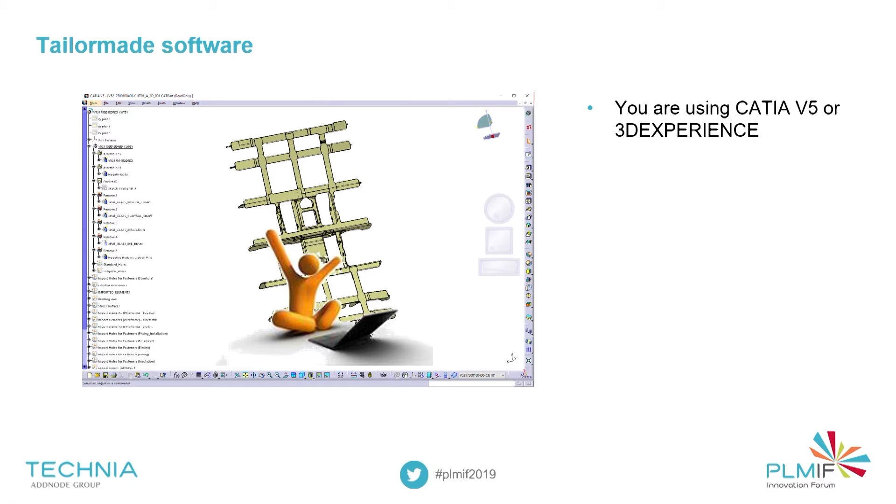So even if CATIA and 3DX are very mature and good products, no doubt, from time to time you or your users may have a wish list because some things are missing. This could be automating your processes, bringing in new calculations, new integrations or whatever. And when it comes to this point, there's the option, and this is where a lot of our products have been born or invented. Also, Remove Invisible was at the beginning a pure customer project.

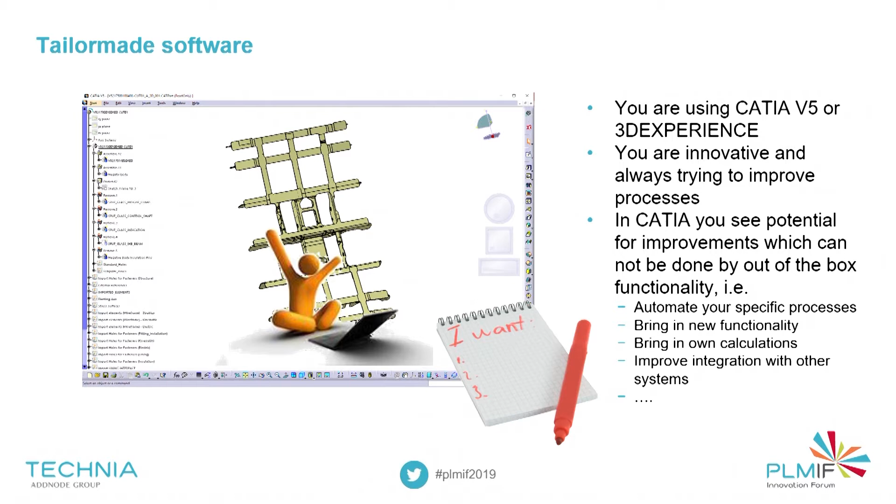So we have the possibility, and CATIA provides different technologies in order to leverage it. Here we can go quickly through it. Knowledgeware you probably know. Here you can already do a couple of automation and checks and show something in the CATIA tree. CATIA automation is scripting. Maybe some of you are already using it because it's quite simple, but sometimes also limited. It's intended to automate certain steps and processes.

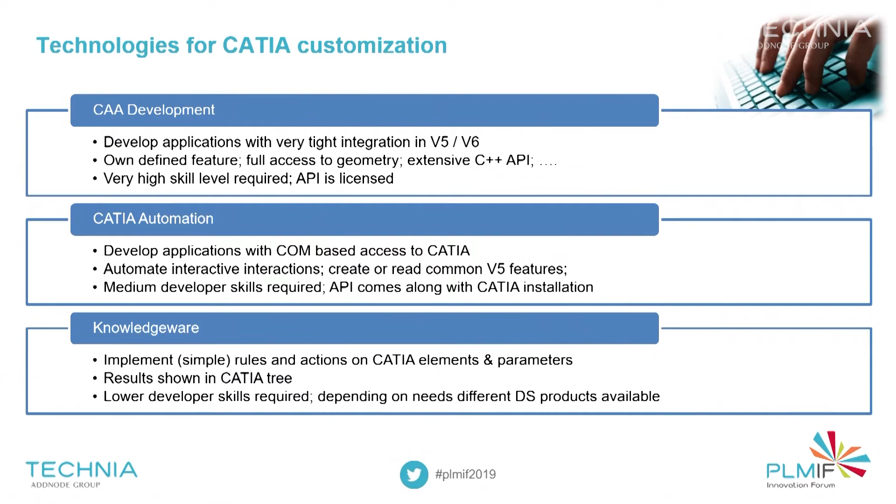So if you really want to do tight integrations, as you have seen with Carver or QChecker, where we touch the geometry, where we have own features in the tree and so on, then there's the capability of so-called CAA development. That's purely C++ development. It's also licensed, but that could be something for you, no doubt. But if you go this way, you have to really ensure that you have 100% of a person working on it, because just in the evening, that doesn't fly. But we can provide services, and we have 5 examples on how it could look.

So the first one is MET - MIBA. That's a customer situation where you have the 3D model and you want to make screenshots of the 3D model. That's not really sophisticated, but here the additional input into the resulting JPEG files is a transformation matrix. So additional information is written to the JPEG file header, with knowledge about the orientation and camera position. It's a very simple user interface where the user can capture these images and store them. From existing images, you can load them, and the position will be changed in 3D.

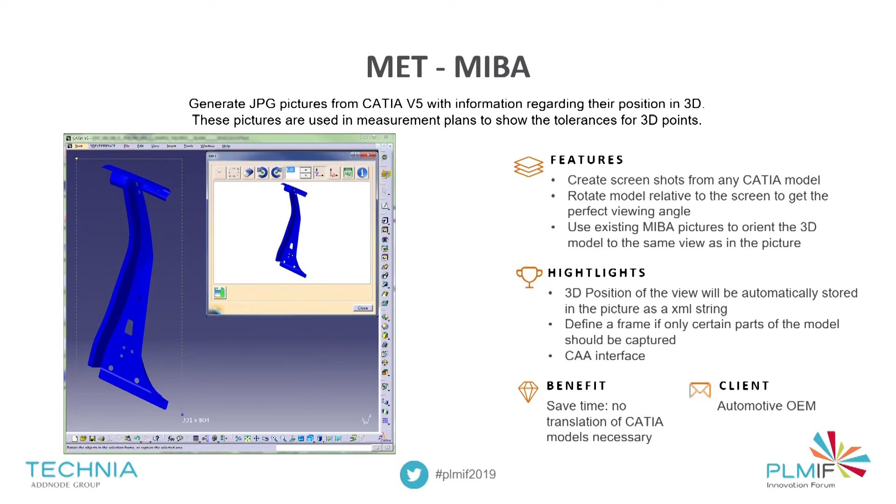The interface is CATIA CAA development. For the customer, it saves a lot of time. The previous process was translating the CATIA data to a neutral format, loading this into a new application, making screenshots, adding the camera positions, and then they have the final JPEG. So a long way to get just one image. Here it's very easy for the end user. Everybody can just use it, open the rectangle, push the screenshot button, and you have the screenshot right away.

We do not expect that you will need this application one-to-one, no doubt. But this should give you a glimpse of what is feasible. We also have customers using this screenshot functionality from certain angles to export to PowerPoint, directly in the right management format, just clicking a button or running a batch process and getting the perfect PowerPoint, also with some text input. So maybe with this input you can find other places where you can improve your processes and make your engineers happy. Correct. Give you ideas of what is feasible. That's the intention.

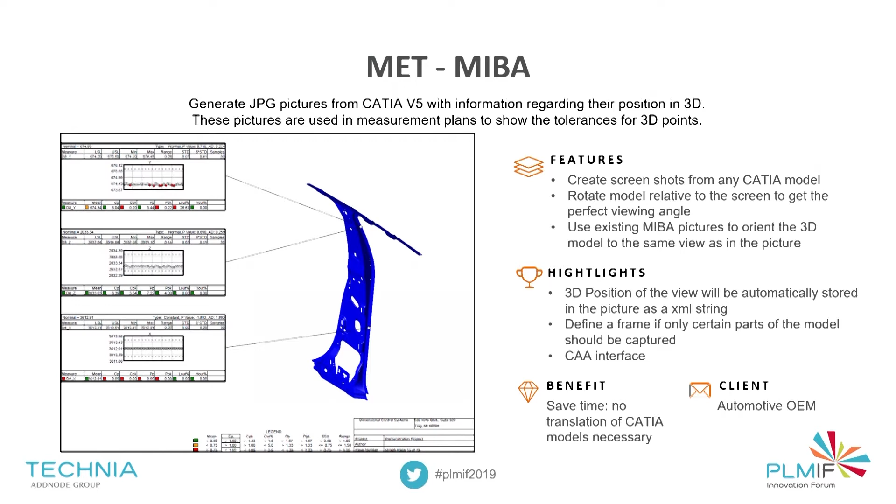The result will be a screenshot, and the customer will use it in downstream processes for measurement plans, and the real measured results will be attached to the 3D or the JPEG model. In this case, they have a quality tool. Correct. Where they need this information in order to check whether the real data in production is according to the CAD data. Yep, correct.

Okay, second example. With Meiller Kipper, that's a project we did about bill of materials. The product restructures the assemblies according to their needs, which are also needed when they do a sync with SAP. It also automatically generates text leaders and BOMs, and finally creates BOM tables that are put on the drawing or in Excel sheets, which will later be sent to SAP. Correct. So it's a couple of different functionalities they use to fulfill the need for the SAP exchange, having all the relevant BOM information in the different formats they need.

Correct. So you also have an inbuilt CATIA application where the user can go step by step through the different scenario steps: restructure it first, create the text leaders, create the BOM list, fully integrated. Also with status queries, you have history and updates integrated in the CAA interface to see if things change between revisions. You get the update status, and you can just click on the local update to get this pushed to the 3D.

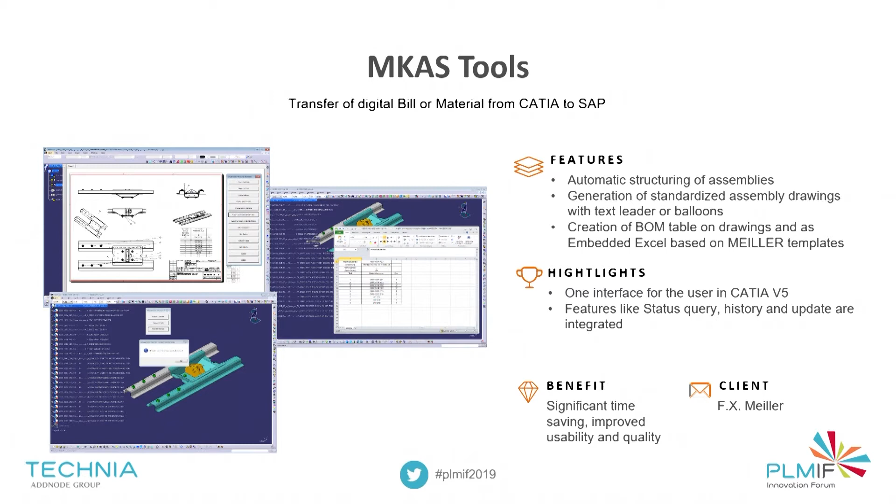And it was also very interesting because it started with a small CATIA Excel application, to extract information from the CATIA model, put it into Excel and save it, and then the users got more and more hungry. They figured out, hey, that's working great. That's exactly what we need. What if we do more in this process to fully fulfill the requirements for the SAP and BOM integration?

Indeed, the initial scope was much smaller, and then we see continuous delivery of days, yeah. Correct. With the continuous delivery, we delivered first prototypes, and then discussed a lot in exchange with the customer, and then users get hungry, and new ideas were born.

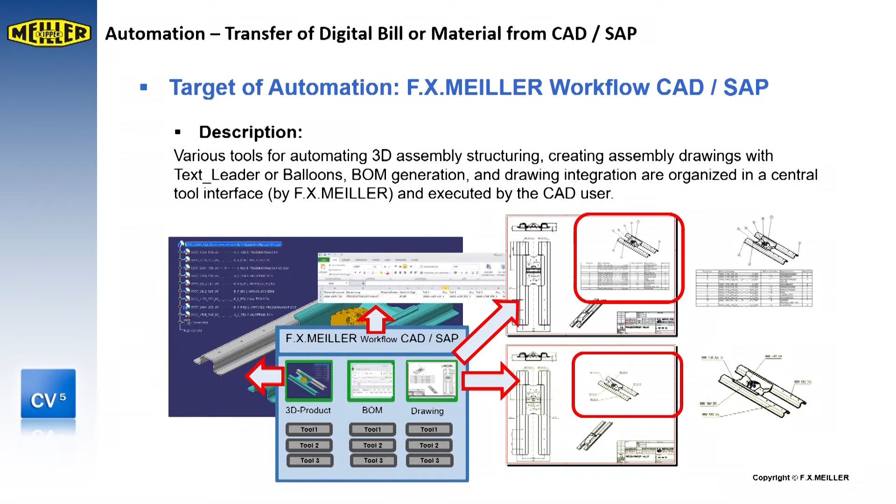It's just again showing how it looks like. You have the 3D structure, the BOM, and the drawings. So the drawing is automatically created. The text leaders are positioned. The drawing table is positioned on the drawing itself, but also exported to Excel with a specific format. Also, the customer here had very specific requirements on the format, how the Excel sheet looks like, depending on the processes, depending on the products, with colors, with text sizes, very customizable and adjustable to these templates.

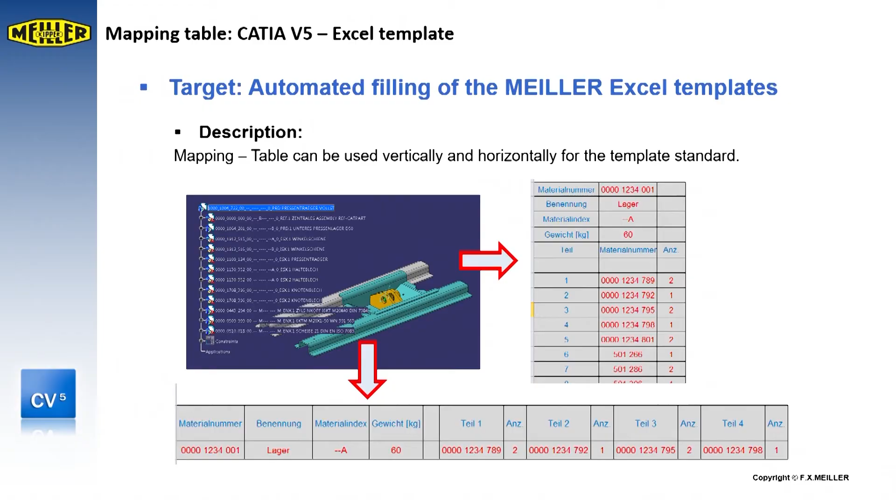Okay. Another example. I take this one. Yes. Also here, this is also a rather simple looking one. Maybe I show you this one.

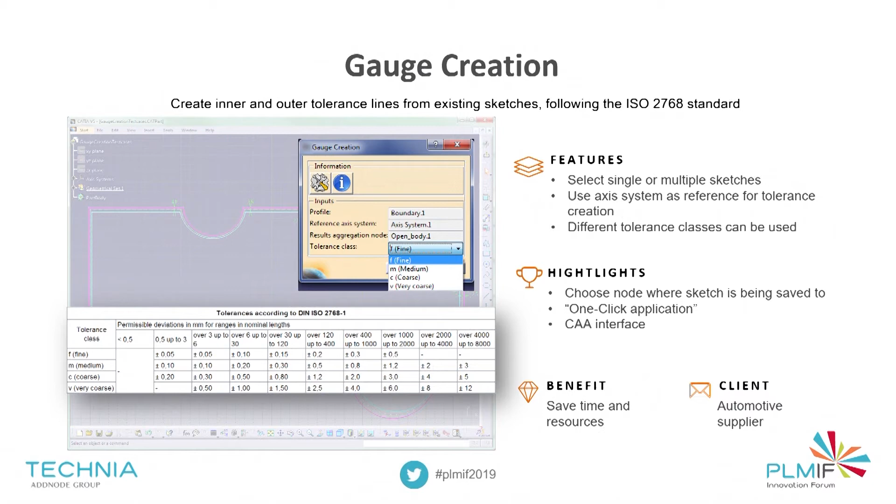This is about airbag fabrics. So you need to cut it in a certain way, but there are some rules and ISO standards you have to follow. So there's a tolerance list, and depending how it looks like, where there's some section and so on, you need to follow these tolerances. So quite annoying, and of course not easy for the end users to make offsets of a contour. This is an easy contour, but they have definitely much more complex ones, and they told us that it could take up to 2 days to just create offsets in a proper way.

So here, automation, to make it simpler and with less errors, is definitely the topic. So we started with the interface. Very easily, you select the contour, you select the tolerance class, and then it automatically creates the offsets, the inner and outer offsets. Saves time and resources of the customer, very beneficial in terms of automation. So here it's really about creation of geometry inside of CATIA. Yeah.

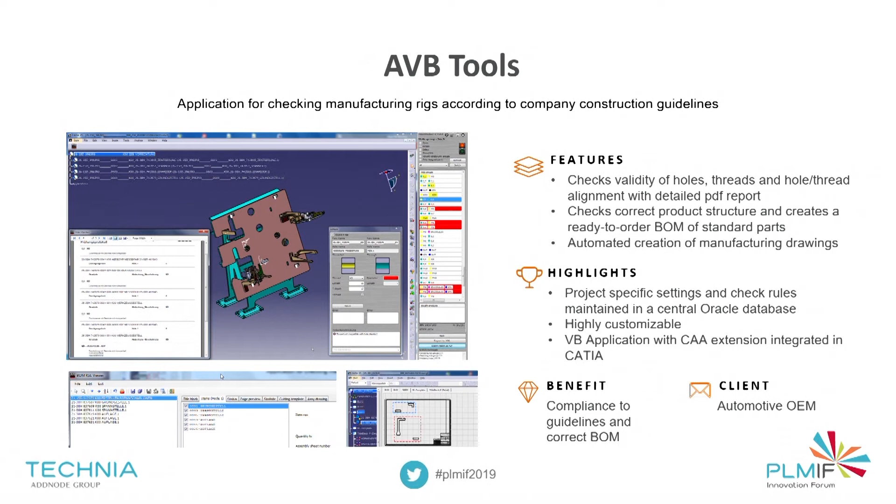AVB. Good, that's also from an automotive OEM, a bigger application in the meantime for, what is the best English word? Arbeitsvorbereitung. Manufacturing planning. Work preparation. Yeah, correct. So where they build this geometry, where they have a lot of internal rules to fulfill, to check. Shall we run the video? Yeah, we can run the video.

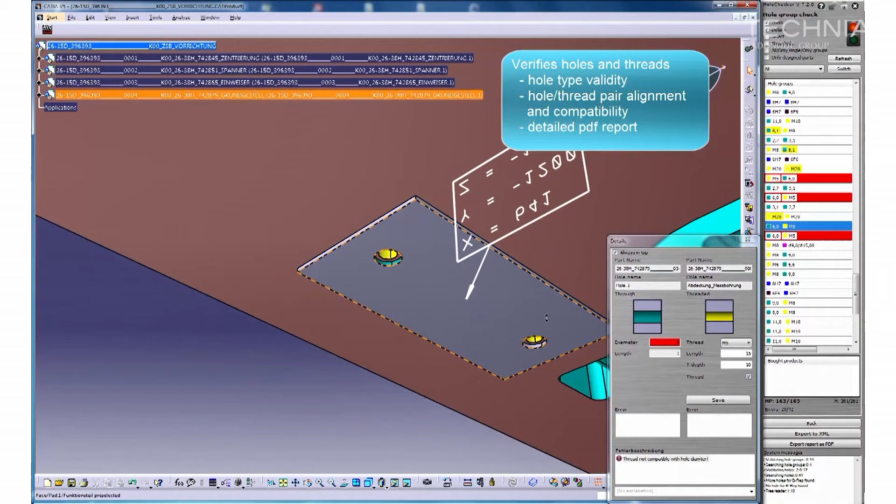Where they are going to check, for example, the different hole pairs, if everything is matching, and a couple of other rules, which are all stored in their own database. Also here very highly configurable in order to adapt it on customer side, and this they do not use only internally. They provide it also to all their suppliers, and to have one common database and one set of rules, they have this database which is accessed by the suppliers and then brought into the CATIA models.

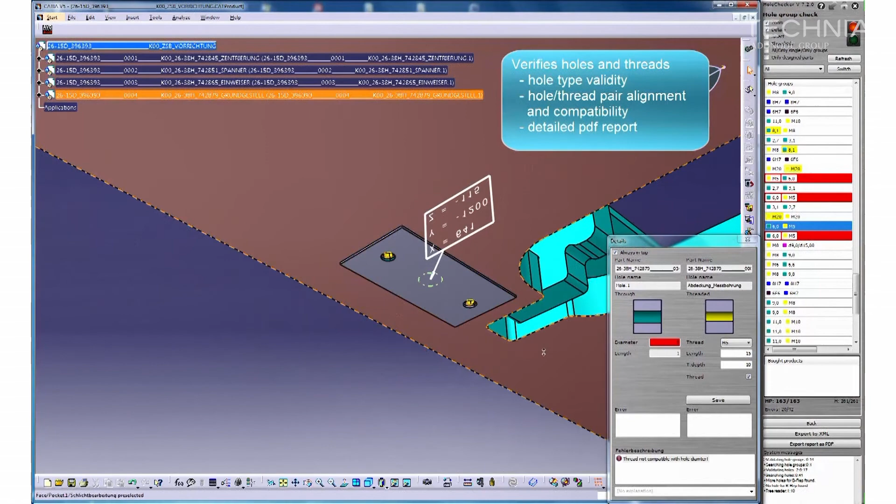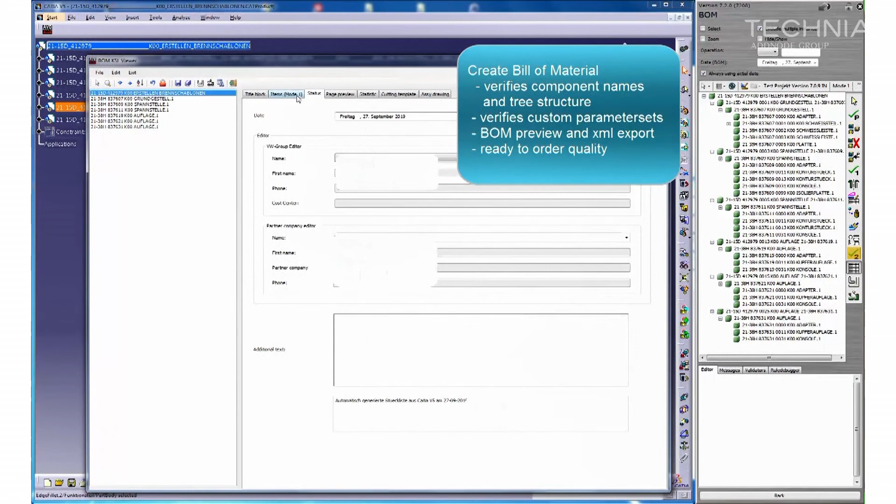So it's quite a huge application, but showing you what is feasible also when it comes to integrating suppliers and having a lot of configuration and customization possibilities. Right. Like here, finding the hole pair, a hole of 6 millimeters, then you're compared with an M5. So this is also creating a bill of material automatically. You have the output here in some customer-specific view, and it also generates drawings from assemblies where you can position the views automatically.

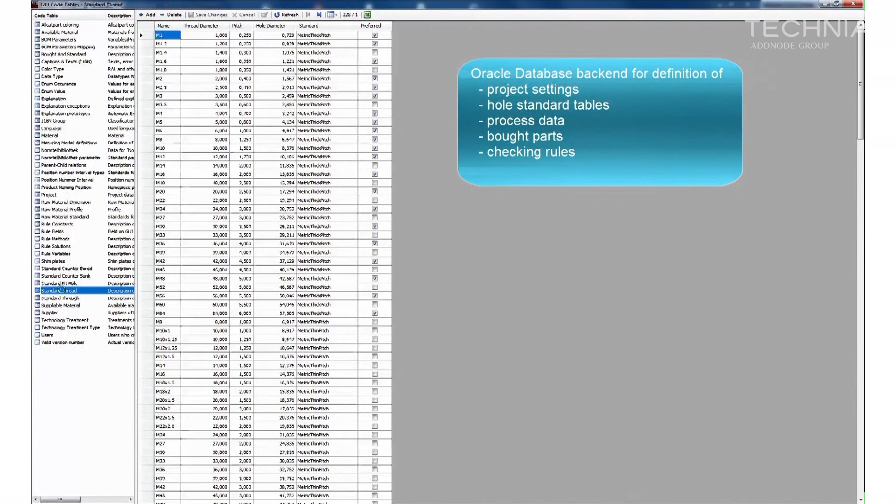And finally, we have a look at how the configuration and the rules look like. I think that's not too much for the timing. A lot of things to adjust. Every project is handled here with different settings and rules. Yeah, everything they do is set up.

Quite sophisticated. And last but not least, when it comes to the latest CATIA functionality, so composites in this case. What is available in CATIA is quite good, but building up all these plies and taking care of the right orientation and so on is a lot of manual work. Together with our colleagues in the UK, we developed for one customer some automation for that. In this case, also based on CAA, because there were some gaps in the scripting API, and this brings a huge benefit to the end users.

Compared with the manual time, they are at, I think, less than 10% of the time they need in order to build up all these plies. And if you multiply this with a couple of parts which they design and produce, it's a huge saving. So this is really automation of the design process, making it much easier, more robust, error-proof, and much faster. Correct. So we are providing CAA interfaces so that they can develop the Visual Basic application.

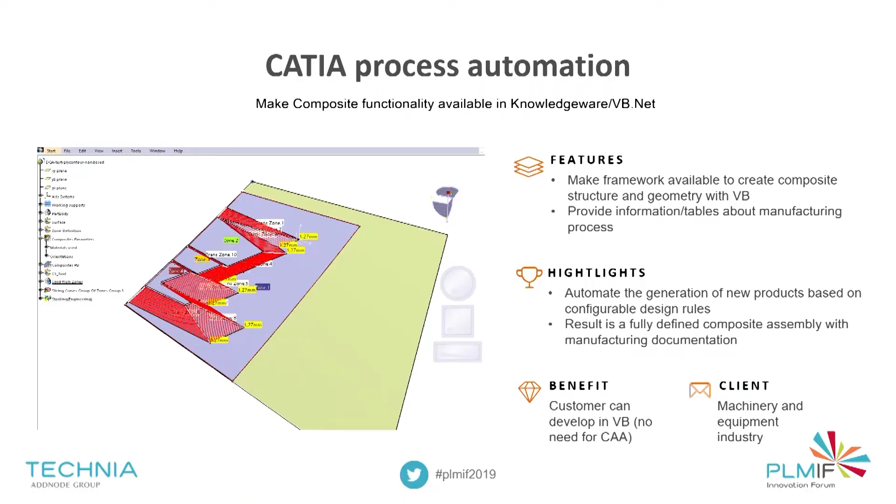Okay, finally, how can such a project look like? We are very open when it comes to such kinds of projects. Typically, we're discussing very closely with the customers about their problems, having good ideas already from the many projects we did. So working closely in a typically agile project setup with different models. Time and material, we have fixed price projects. We can also talk about maybe making a product out of it in the future. So different setups we can think of.